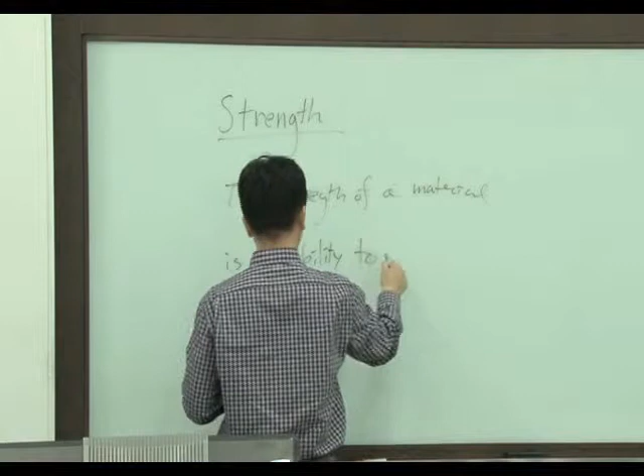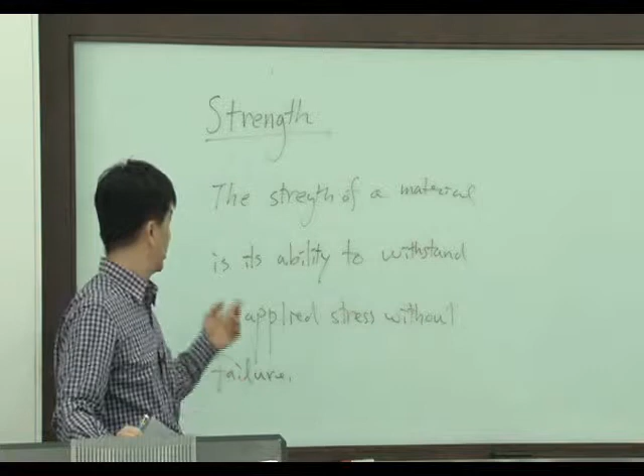So strength is... let me give you a definition of strength. The strength of a material is its own ability. It means strength is a property of a material. It depends on the material. Strength of rubber, strength of steel, strength of aluminum are all different. It's the ability to withstand the applied stress without failure.

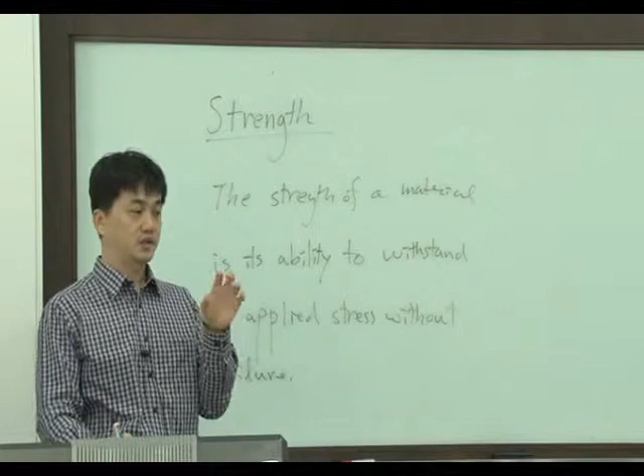Here the failure means material failure. There are many scales of failure. Material failure means very local level failure. There's also structural level failure, which is very large scale. So now we are talking about local failure, material failure.

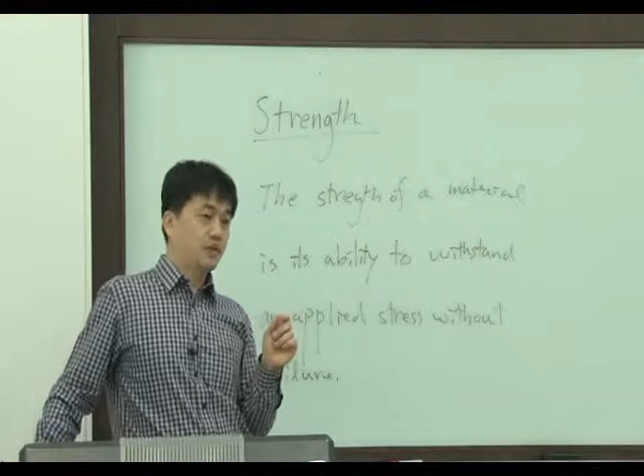Material failure really depends on strength, and again, strength is a property of some material. You know that, right? When we apply external force, some material fails, some material doesn't fail. So it's a property of a material.

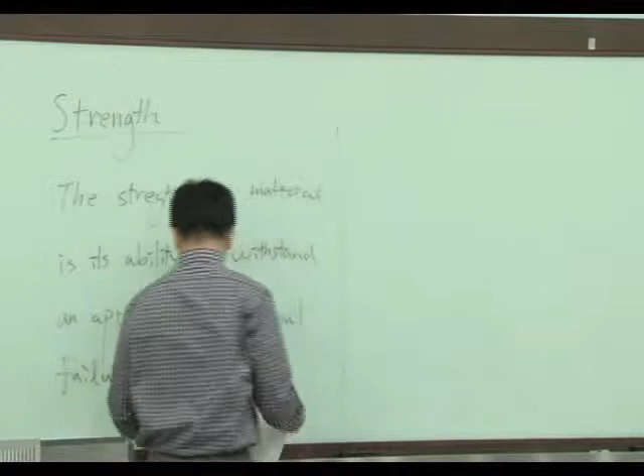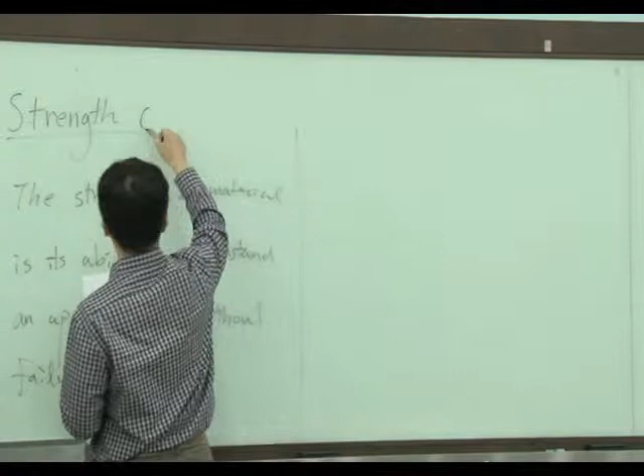Long time ago, people tried to define strength. They wanted to know how material fails, so they made a lot of different strength criteria. So today's topic is strength criteria, I'm going to write down again.

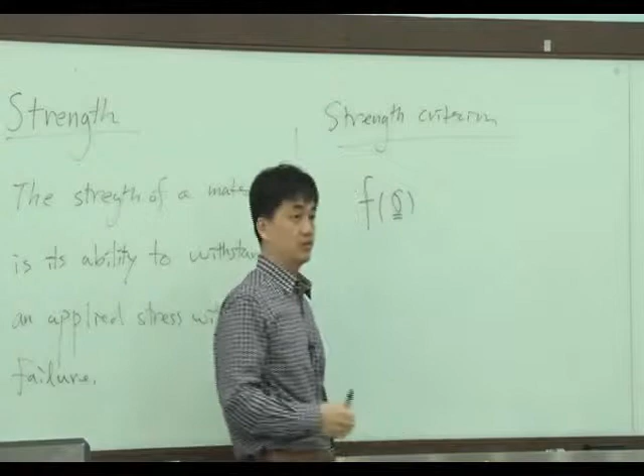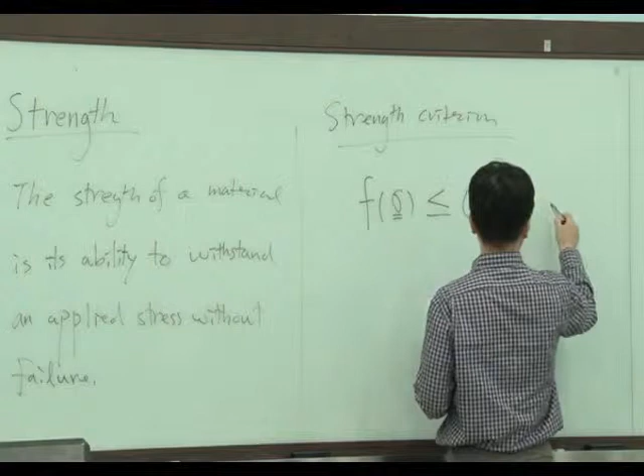So people define some function f. This function f is a function of stress, a function of the components of the stress tensor. This function of stress tensor should be smaller than 0 for all possible stress states. We are saying this is a material strength domain.

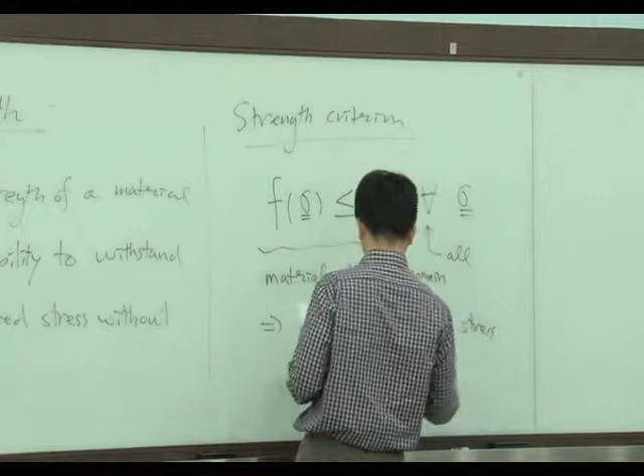The material strength domain defines the admissible stress state. This means all stress states must be within the strength domain of the material.

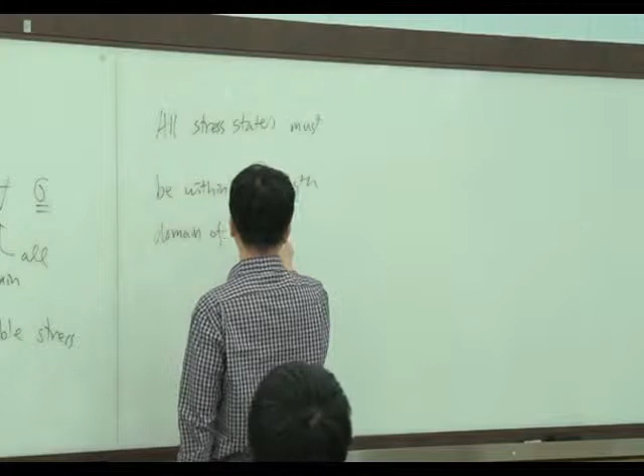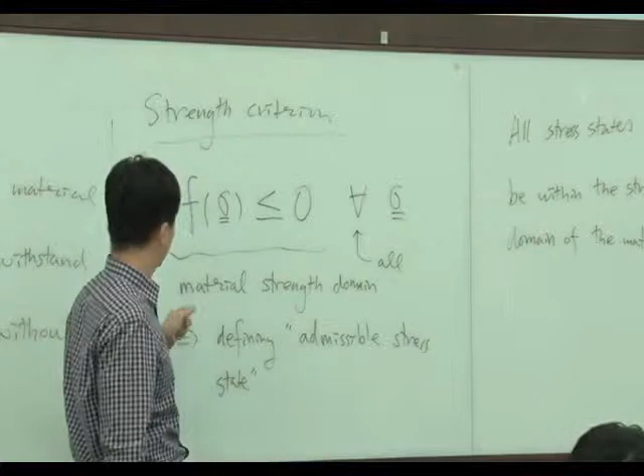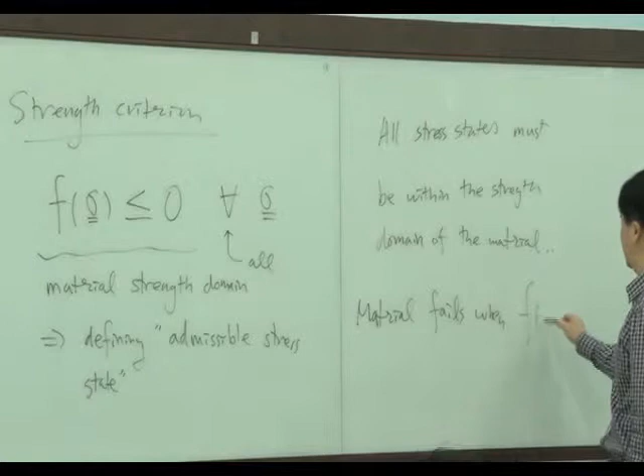Now this looks conceptual. The stress field, stress tensor, must satisfy this condition. Material fails when f, that function, equals 0.

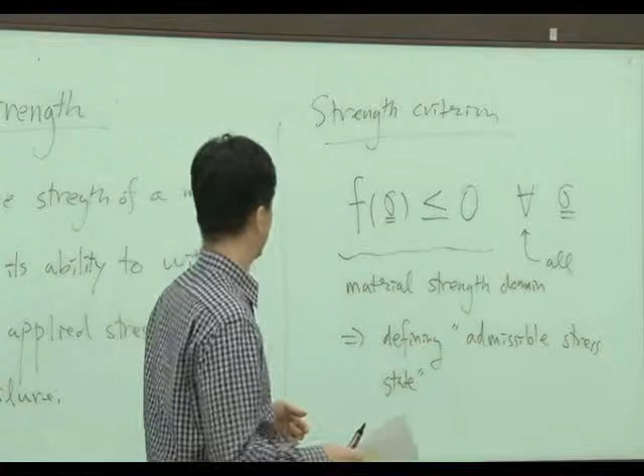So usually we define strength with the function f. The other name of function f is a load function or loading function. This function should always be smaller than or equal to 0. When this function becomes 0, it means material fails.

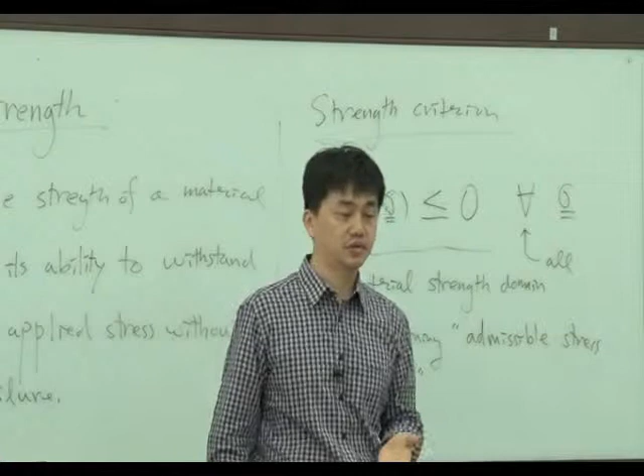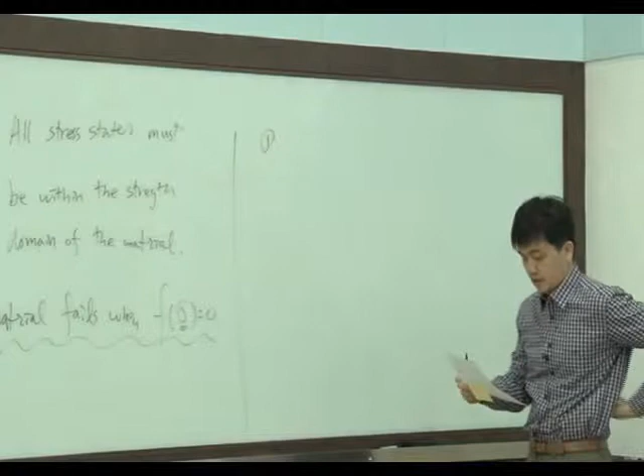Now it's very hard to understand, but if I give you an example, you can easily understand. Strength criterion has the form of this. Let me think about the first and easiest strength criterion: tension cutoff criterion.

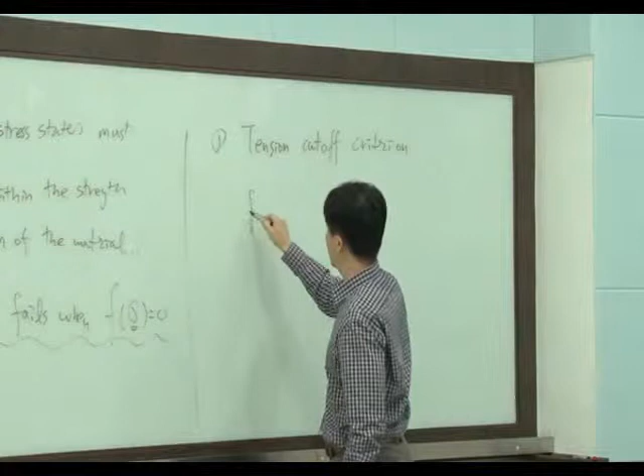Tension cutoff strength criterion defines the function f like this. The biggest principal stress, sigma 1, minus Ft, should be smaller than 0. This is the function: biggest principal stress minus this strength parameter.

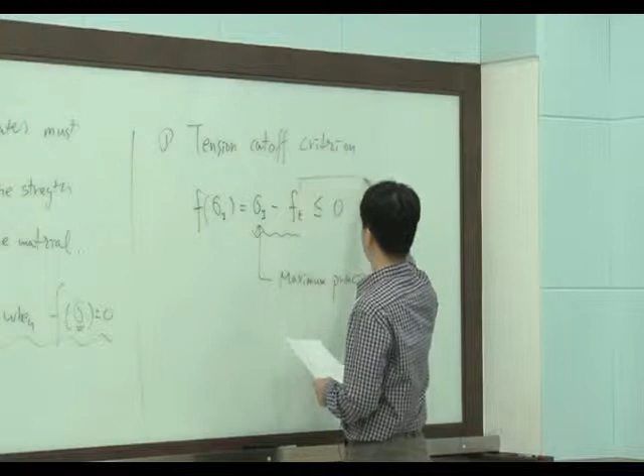This parameter is given from material testing, and should be smaller than 0. Failure happens when principal stress sigma 1 equals Ft, the maximum principal stress. We are saying Ft is the tensile strength.

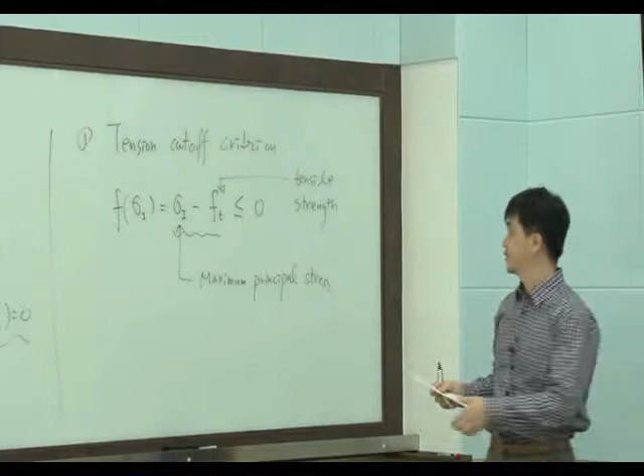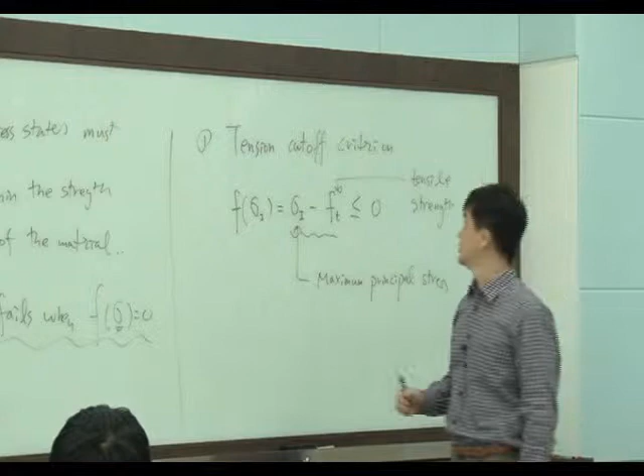This strength depends on the material, so we need to do some experiments. Admissible stress means the maximum principal stress cannot be bigger than tensile strength, if the material follows the tension cutoff criteria.

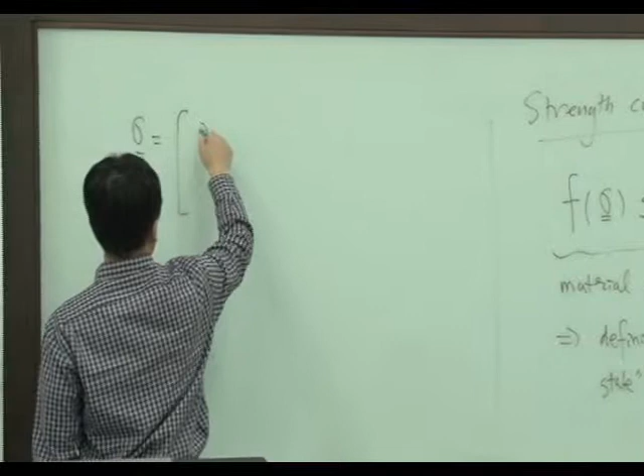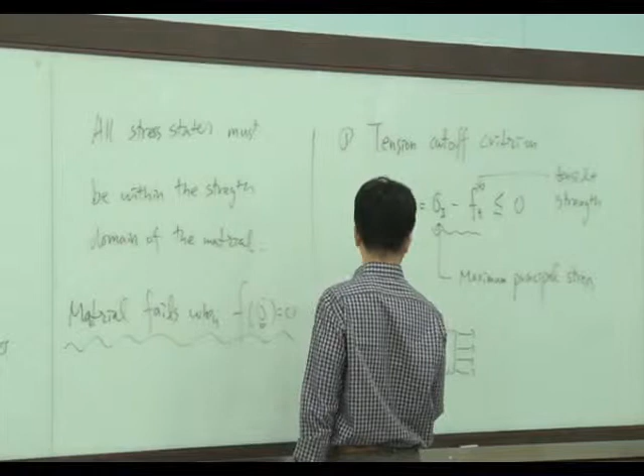For example, let's consider some material, and I'm going to give it some tension, sigma. That's the direct tension test. For that test, we have a stress tensor with values 0, 0, 0, 0, 0, and sigma 1 equal to, let's say, this value, and principal stress 2, 3 equal 0.

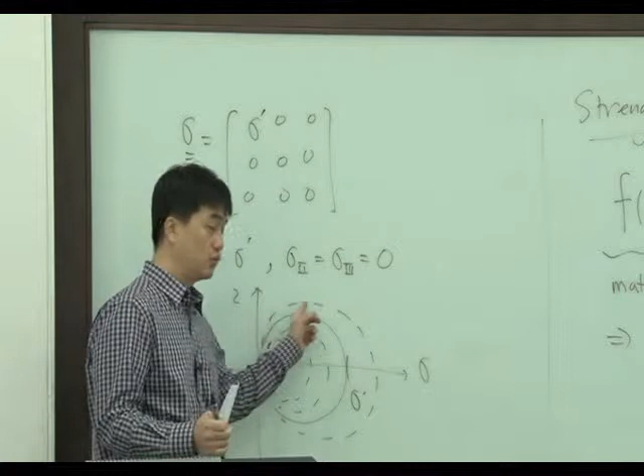We can draw that in a Mohr circle, tau versus sigma. This is sigma 1. I'm going to increase this sigma 1. If I change this sigma, the circle will change, becoming bigger. In the direct tension test, all stress states are under this circle, which becomes bigger and smaller depending on the applied tension.

Let's think like this: I'm going to increase that stress, then the circle becomes bigger and bigger. Then this stress meets some criteria here. This means the function sigma 1 equals Ft, then material fails. So this is the condition: f of sigma equal 0.

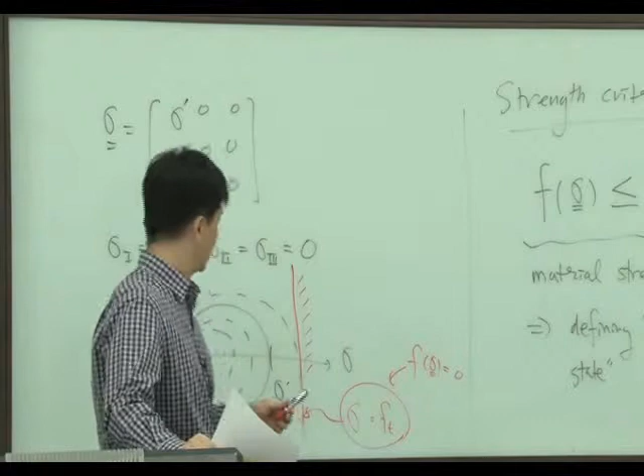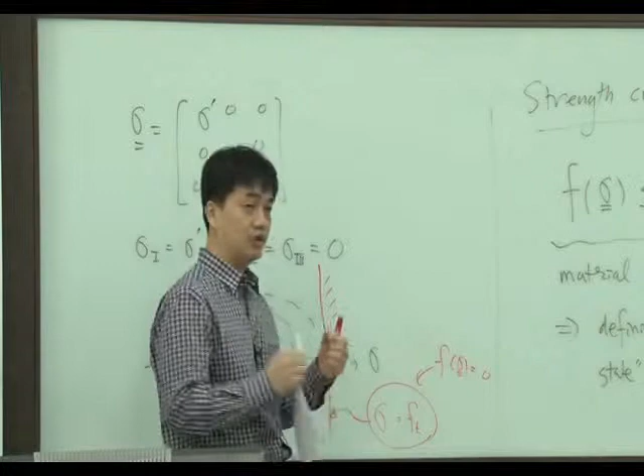So if there is some material which follows the tension cutoff criteria, the stress state, the Mohr circle, should be within this range. The circle cannot be bigger than this line, Ft. If it's bigger, that's not admissible, not a possible stress state. The maximum is this circle; when it reaches the maximum, we define material failure. So that's the tension cutoff, very simple.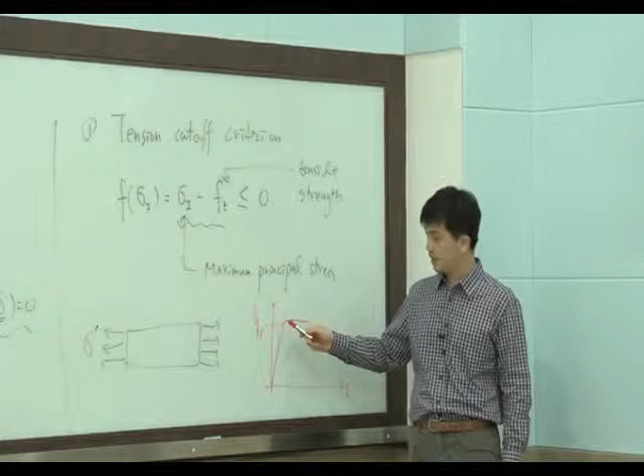If we do some experiment, we can draw a stress-strain curve, strain and stress. There's going to be some linear range, then failure. We are saying this is Ft. Failure means that even though we increase stress, at this point, even without increasing stress, strain happens - displacement increases very rapidly without additional stress increment. This means failure.

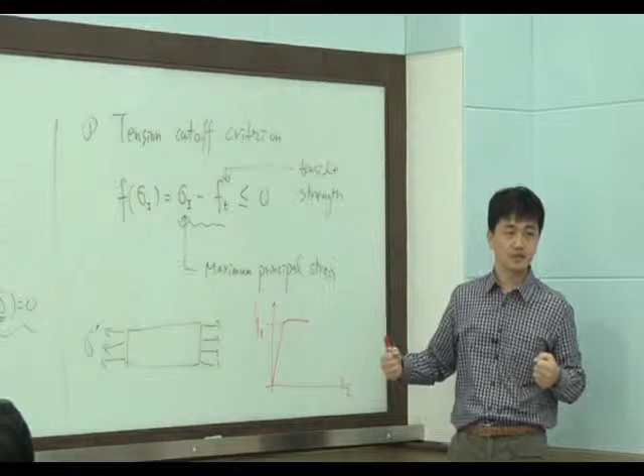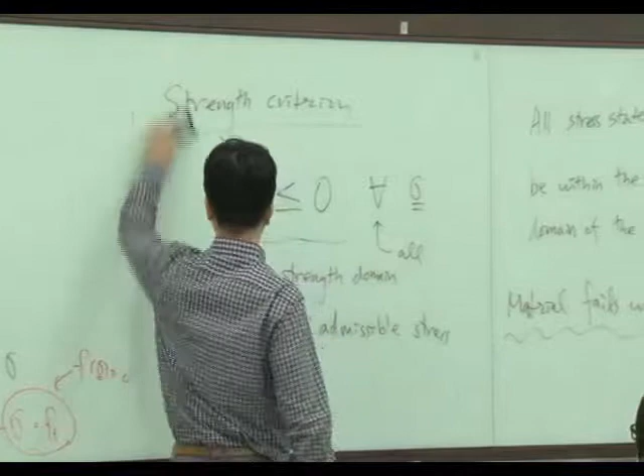Tension cutoff criteria is just one of the criteria. There are a lot of possible criteria, and that's the simplest strength criteria. Let me consider a little bit more complicated one: Tresca criteria. The other name is maximum shear stress criteria.

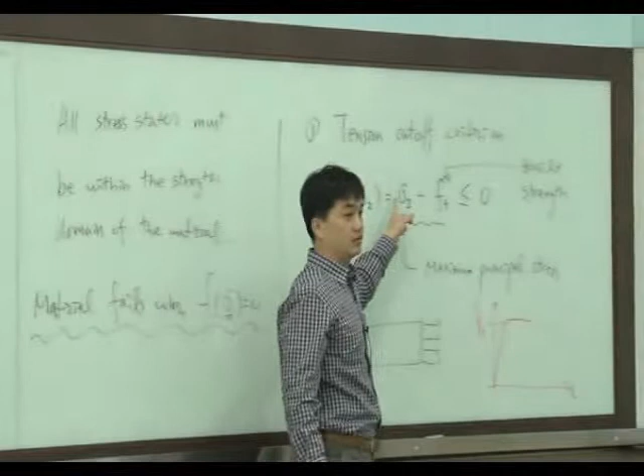In tension cutoff criteria, the important stress is principal stress - this is normal stress. And in Tresca criteria, failure is governed by shear stress. So in tension cutoff, failure is governed by normal stress, but in Tresca criteria, failure is governed by shear stress.

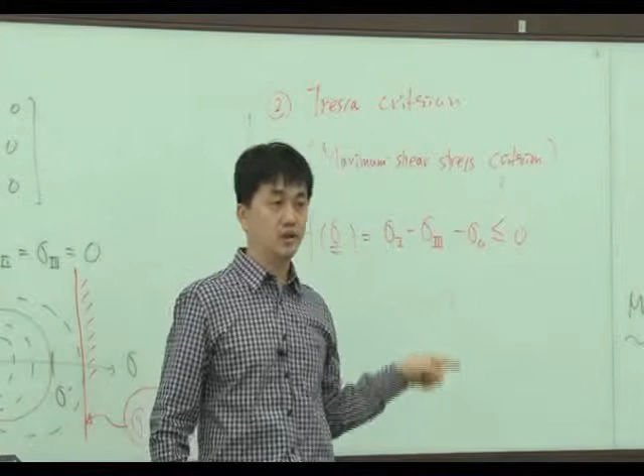Its definition is that F can be defined by F equal stress 1 minus 3 minus sigma 0, smaller than 0. Stress principal stress 1 minus 3 means the diameter of a Mohr circle.

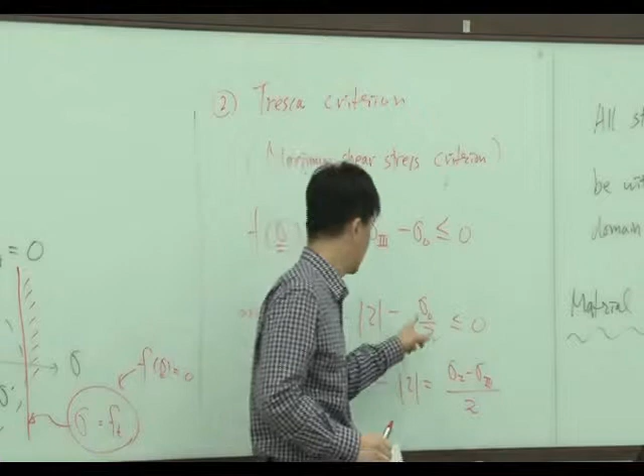Half of the diameter of the Mohr circle is the maximum shear. This tau equal tau minus sigma 0 over 2 - actually this tau is the same. So Tresca criterion is governed by the maximum shear stress here. When the maximum shear stress equals some material parameter, we consider material failure.

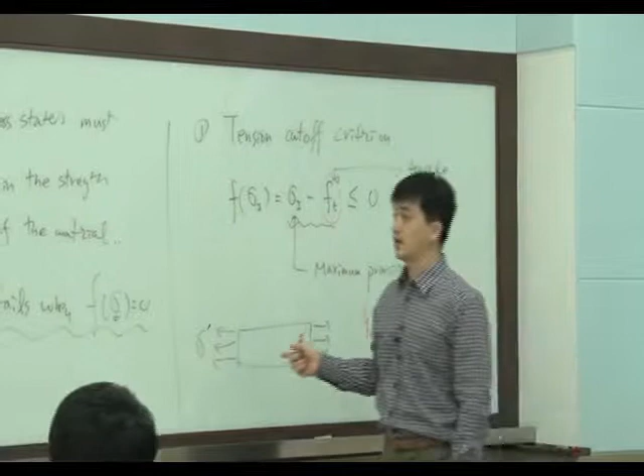In tension cutoff criteria, Ft was the material parameter defining strength, and in Tresca, sigma 0 over 2 is the material parameter defining strength. So for both material strength criteria, we have only one material parameter, meaning we need only one material test.

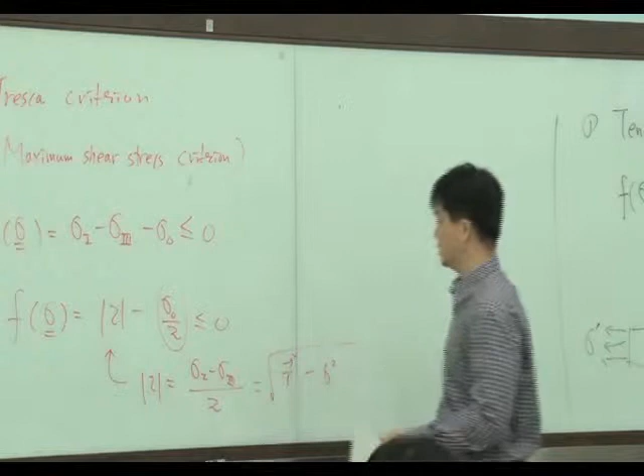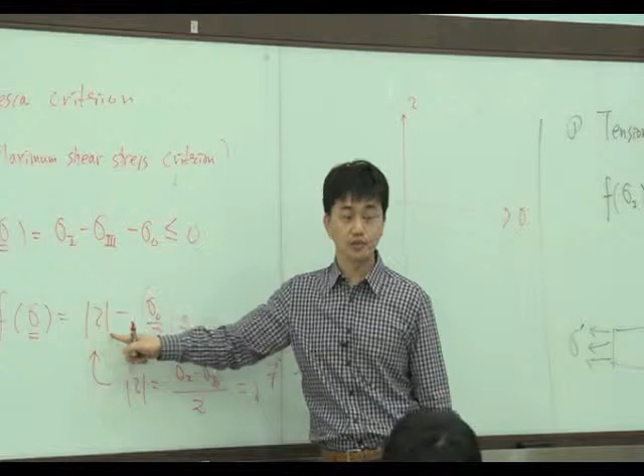Let's consider that direct tension test. So this graph means tau here, and sigma here. This tau should be within plus minus sigma 0 over 2. So tau equals sigma 0 over 2, and tau equals minus sigma 0 over 2. So the Mohr circle should exist in this range.

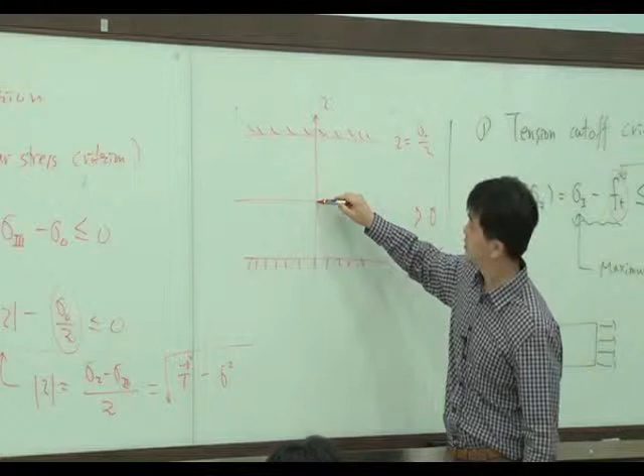For the direct tension test, when the stress is small, we get this circle, and as stress becomes bigger, the circle grows. This is the maximum size of Mohr circle which is possible. In the direct tension test, if the Mohr circle meets this line or this line, material fails - we define material failure there.

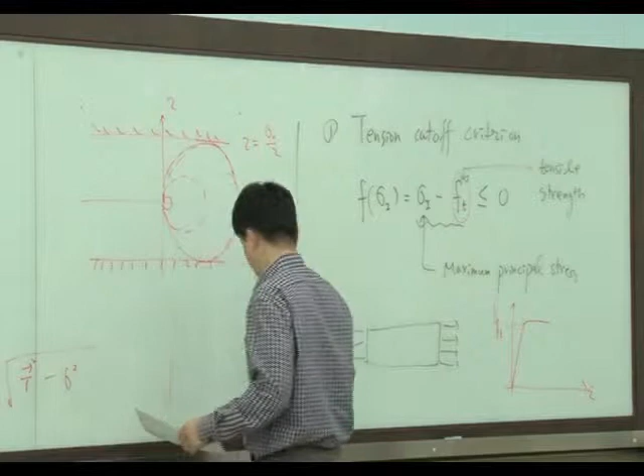How about the simple shear case? Simple shear case means we have a transpose shear tau and tau. In this case, here sigma and tau - the biggest Mohr circle looks like this, and here we have a small Mohr circle inside.

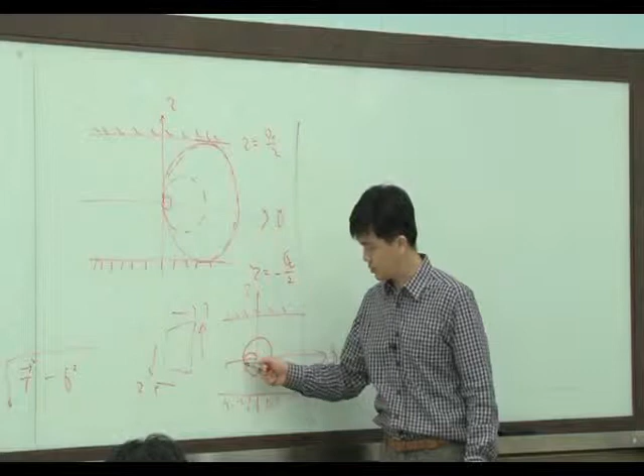If we increase the shear, this circle increases. So when this biggest Mohr circle meets this upper line and lower line, material fails. This is the Tresca criteria.

Let's consider the direct tension test case. So we are tensioning the material like this, and material fails at this point. This is at 90 degrees.

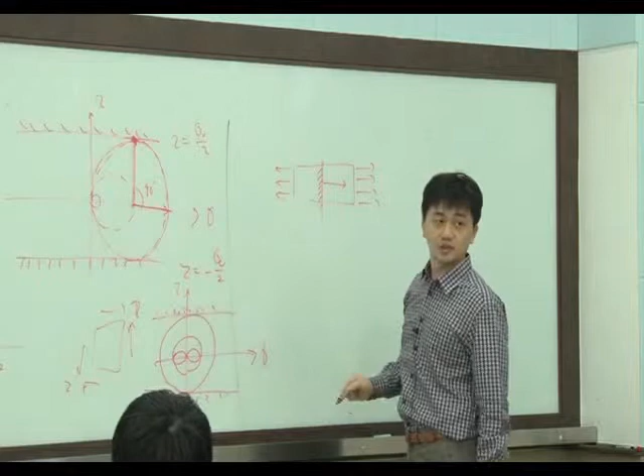This direction is the principal stress direction - so principal stress direction is this. And this is where failure happens on the surface. This surface corresponds to the principal stress direction. This line and this line correspond to each other.

At 90 degrees, material fails, meaning at 45 degrees the material's failure line is at 45 degrees. Material fails on some surface - it can fail here or here. So material fails through this line at 45 degrees or minus 45 degrees - material fails like this. This is the failure line, the failure surface.

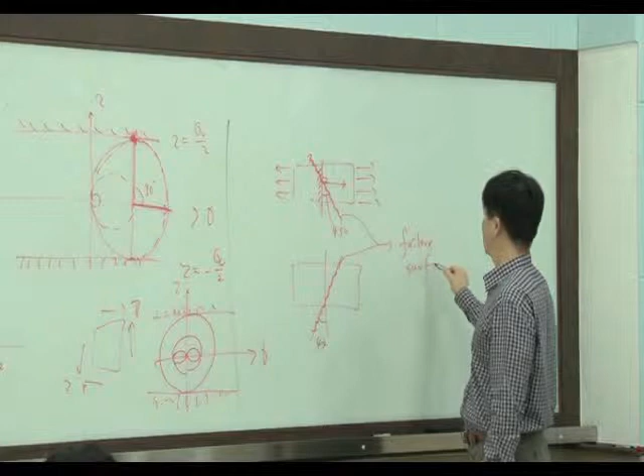So if you understand the Mohr circle and stress criterion, you can find the failure surface too. We can find when material fails, where material fails, and also the direction of the failure. So the failure surface gives us the direction of failure. A little complicated.

So I introduced two material criteria, and I'd like to talk about two more today. Third one: Coulomb criterion. Coulomb criterion is very widely used. Definition of the function f equals tau - this is shear stress - plus normal stress times tangent of some angle minus c, smaller than 0.

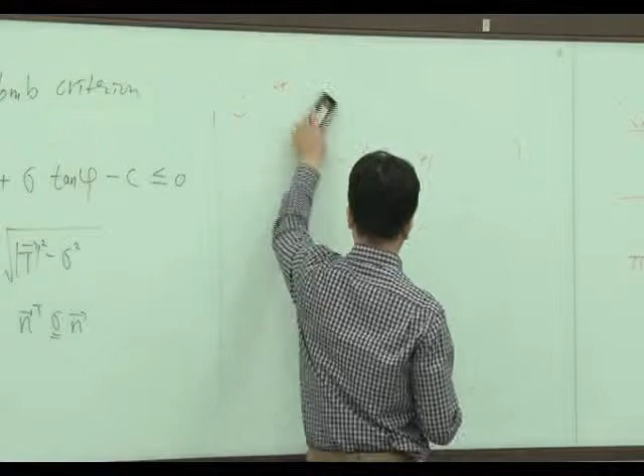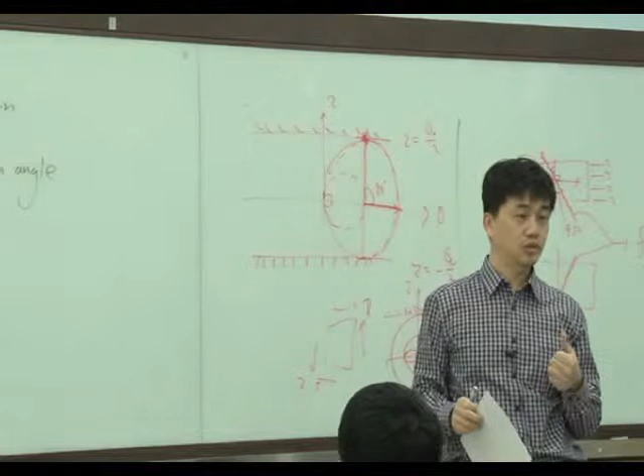So we have two material parameters: C, its name is cohesion, and this is the friction angle. So we have two material parameters - you can find those material parameters by performing two independent material tests.

Very importantly, if the friction angle is 0 and C equals sigma 0 over 2, then what happens? This Coulomb material criteria becomes Tresca. It means the Coulomb criteria is a general version of Tresca.

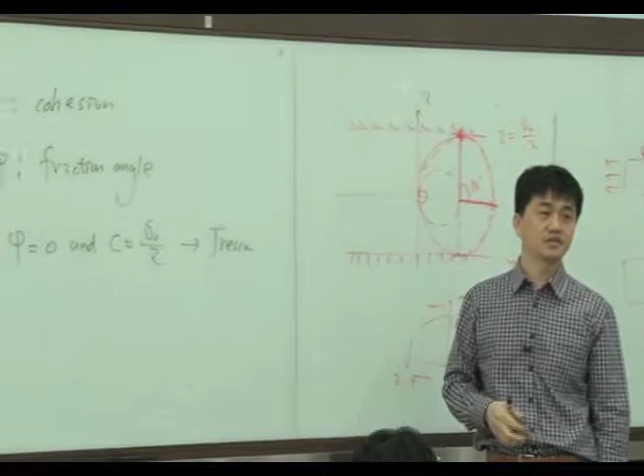Or if the angle goes to pi over 2 and C over tangent equals Ft, the criteria becomes tension cutoff. So this Coulomb criteria includes both Tresca and tension cutoff. In other words, Tresca and tension cutoff are special cases of Coulomb.

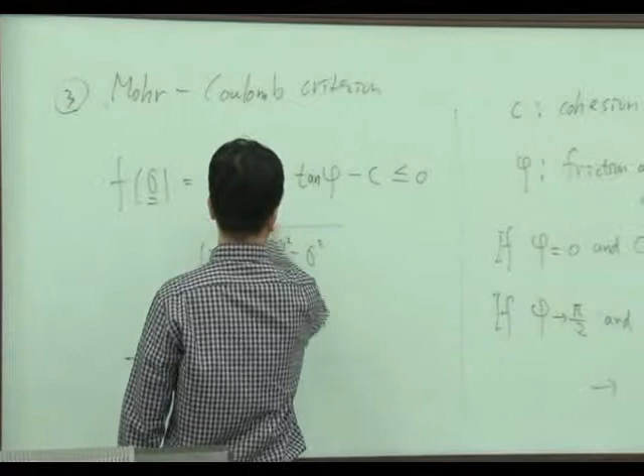So you understand the first one, and the second one? To derive the second one, in this equation, you can divide all three terms by tangent. So tau over tangent plus sigma minus C over tangent.

Here, when the friction angle goes to 90 degrees, this goes to infinity, so this term becomes 0. So we have only sigma here. If we define this term as Ft, the strength criteria becomes tension cutoff.

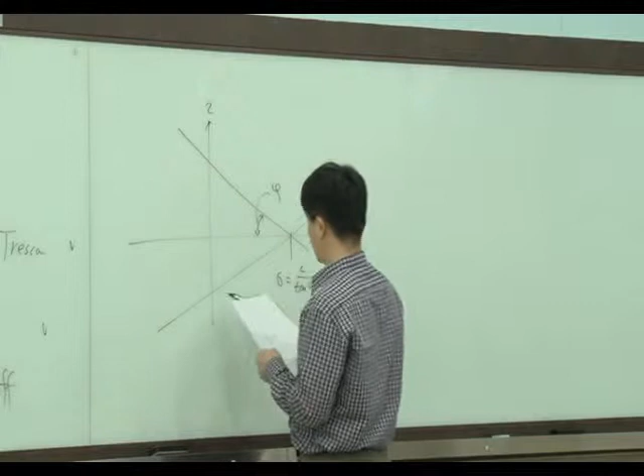This is a criteria. So Mohr circles should exist within this area here. It cannot. This criteria is defined by two lines, this line and this line, right?

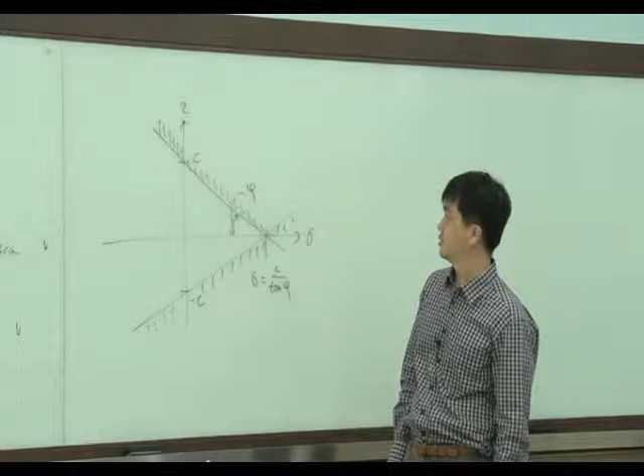So if this angle becomes 0, this line becomes parallel. Both lines become parallel. So it becomes Tresca. If this angle goes to 90 degrees, this line becomes vertical. So this criterion becomes tension cutoff.

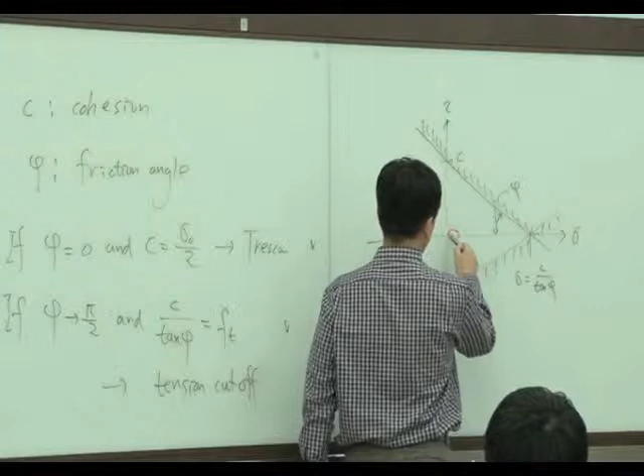So Mohr-Coulomb is a general version of the previous two strength criteria. For example, direct tension test - this is the Mohr circle for direct tension test. And if the stress increases, the circle increases, then this is the maximum circle we can have. And material failure surface can be defined by this angle, because material fails here and here. We can find this geometrically.

This is direct tension. So we are pulling the material. How about direct compression? What happens if we compress both? Now what happens? Same circle, but that circle we have on this side, right?

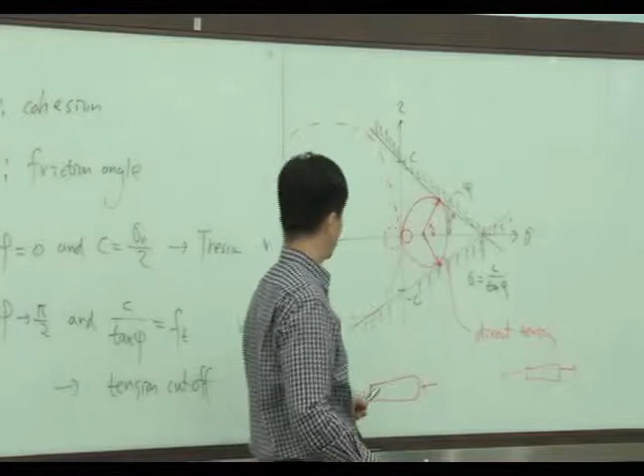So in the compression test, the circle becomes much bigger, right? So both are actually the same test, but strength depends on normal stress, the magnitude of normal stress. So in the compression case, material strength - we have a different Mohr circle, different size of Mohr circle. So we are saying this is a pressure dependent strength criteria.

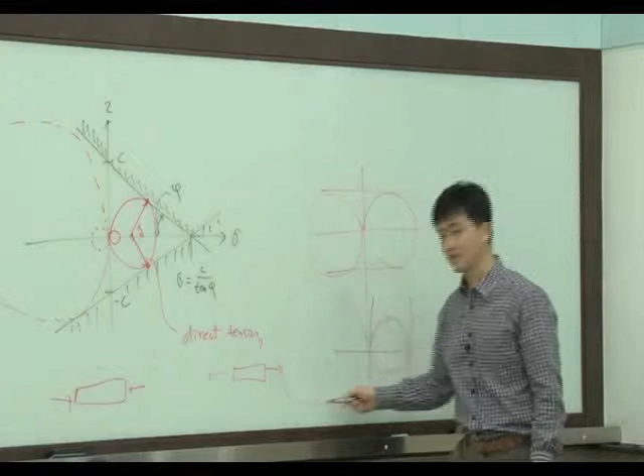Direct tension test case, right? Tresca case - tension, compression, same size, right? And tension cut-off case - material only fails in tension, doesn't fail in compression, right? So this is a pressure sensitive strength criteria.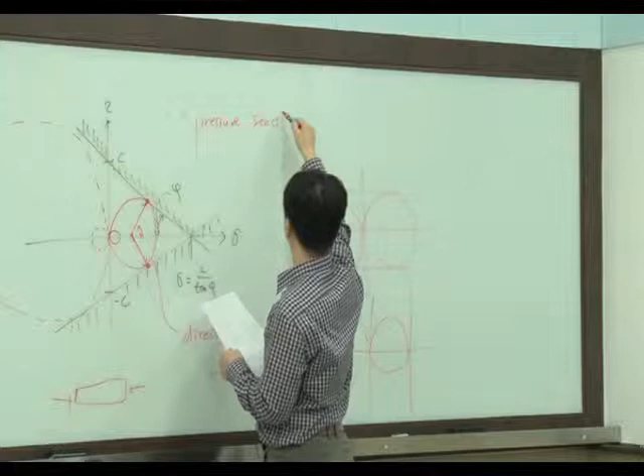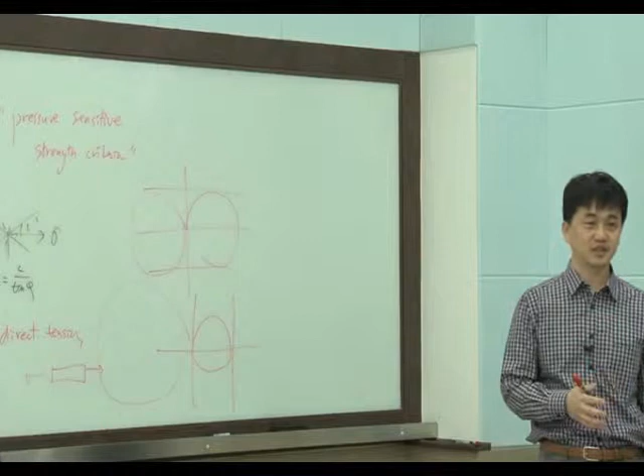In general, material easily fails in tension rather than compression. It depends on the material type, but in general many materials more easily fail in the tension case. So this Mohr-Coulomb criteria and tension cut-off criteria makes sense. And this criteria is derived from a lot of material tests. So Mohr, Coulomb, and Tresca did a lot of material tests, again and again, and finally they found this kind of material criteria.

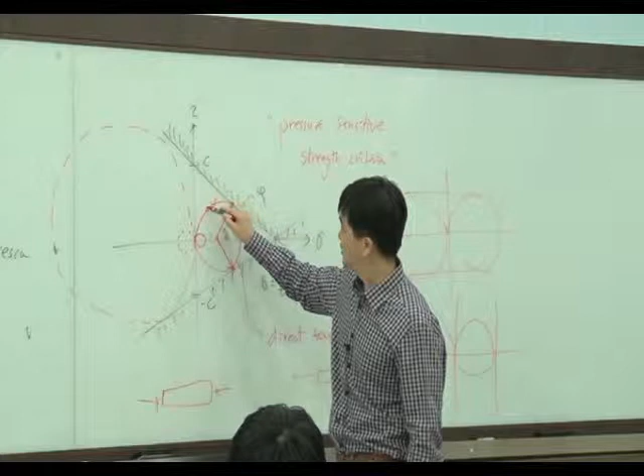After, for example, Mohr did a lot of direct tension tests, and then he calculated the principal stress and put the data on the Mohr plane, and then he finally found material fails like this.

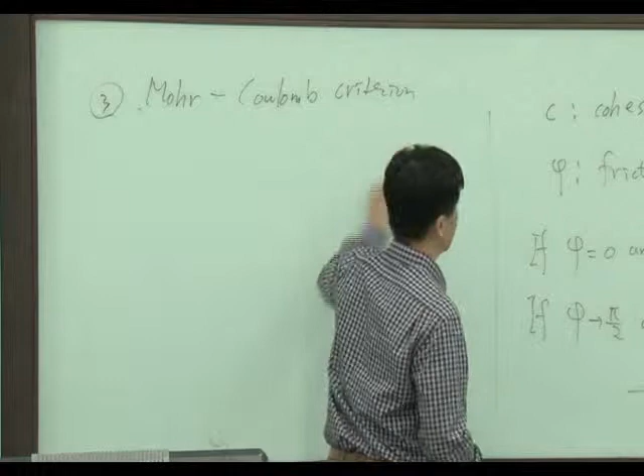Okay, so Mohr-Coulomb material - maybe now I'd like to talk about the most important failure criteria, which is used for steel structure. So you design a pressure tank, right? So how did you find whether material fails or not?

How did you determine? Effective stress? Maybe, I'm really sure you use some material criteria. You remember? So if you do some finite element analysis, you will have stress - six stresses, right? And then if you get the stress, how can you find, how can you know this material fails or not? You did this for your master thesis, right? No? Okay.

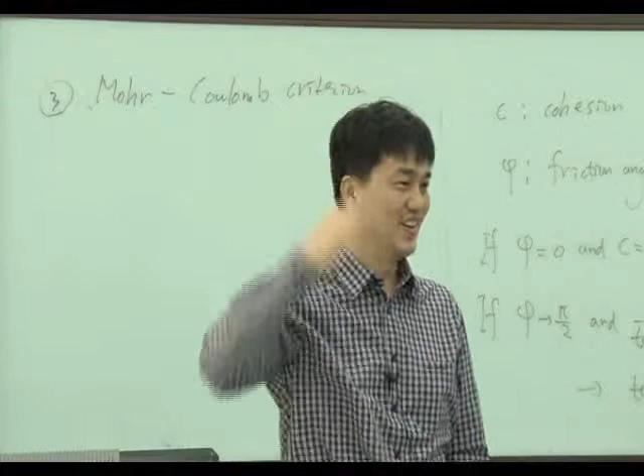So the following material criteria, strength criteria, is very important for steel structure. Von Mises. The equation is like that: F equals square root of J2 minus K, smaller than 0.

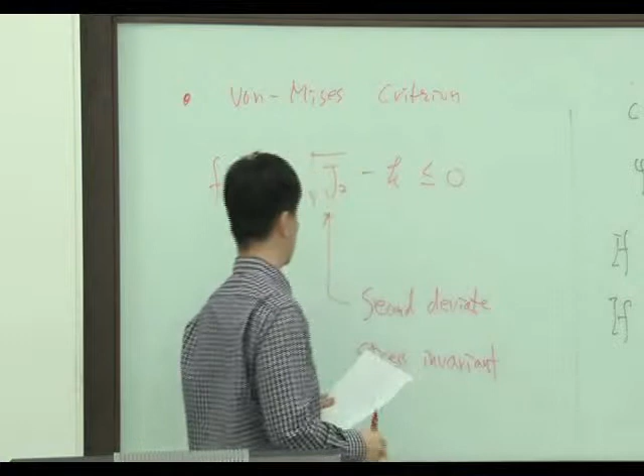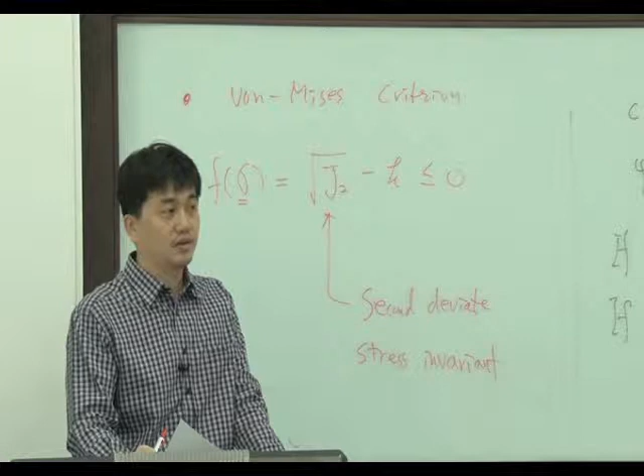So now we are using J2. What's J2? Second deviatoric stress invariant, right? So when square root of J2 reaches some material parameter K, material fails, right? We can define it like that. So to determine whether the material fails or not, we should calculate J2. J2 is the second invariant of the deviatoric stress.

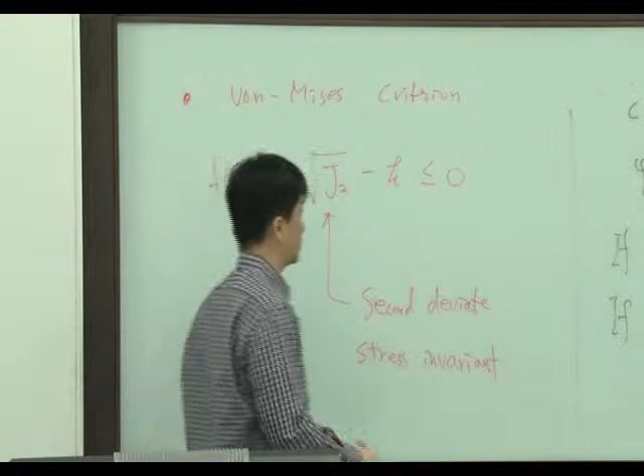What's the deviatoric stress? How do we calculate it? We calculate deviatoric stress by subtracting the hydrostatic part from the stress tensor, right? Also that's maybe the name of a person - Von Mises did a lot of tests.

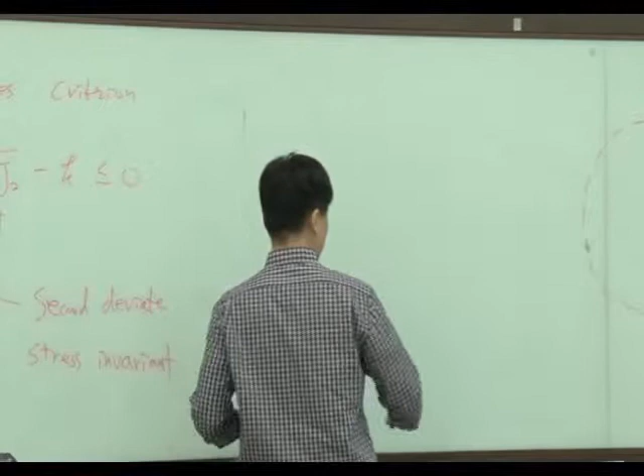And then he finds this strength criteria, von Mises. And we need to understand the meaning of that strength criteria here.

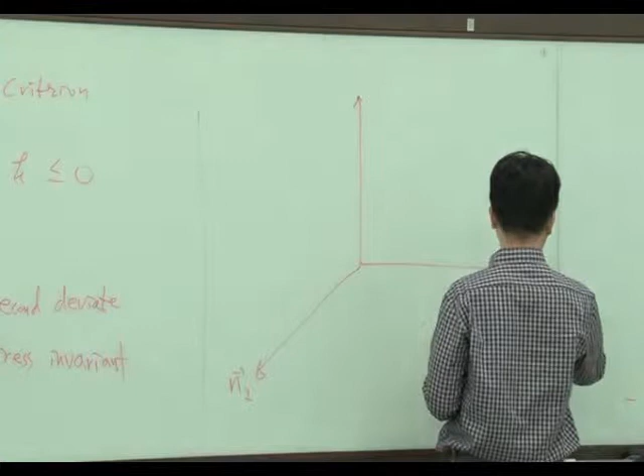Let's draw principal stress space. This is a principal stress space defined by principal stress directions N1, N2, N3. So in principal stress space, all the stress tensor can just be represented by three values - the three principal stresses.

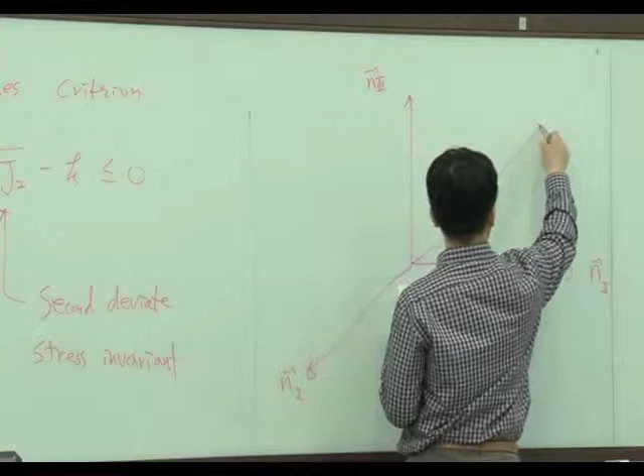And for a hydrostatic state, three principal stresses are the same, so that should be on this line. This is the hydrostatic axis: 1 over root 3, times 1, 1, 1. So if some stress state is on this line, this is a hydrostatic state, right?

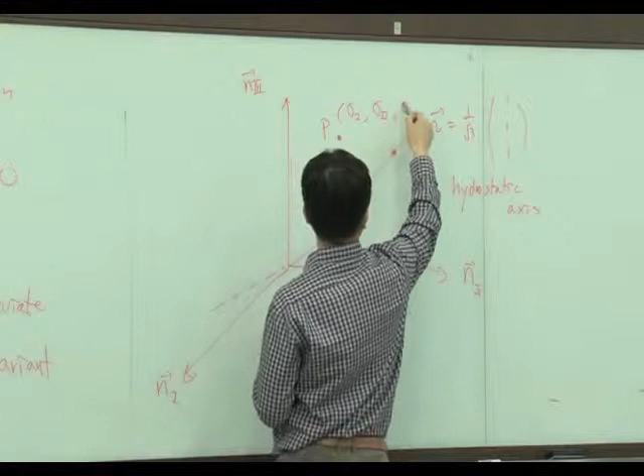Okay, then let's say some arbitrary stress state is point P, here, stress 1, 2, 3. Then this is the vector which represents the stress state, and this vector can be divided into two parts. One is some vector on the hydrostatic axis, and this distance, and the other part is this one. So here, something like that. Let's say here O, and this point is N, this is P. Okay, maybe I need to do this job in the next class.